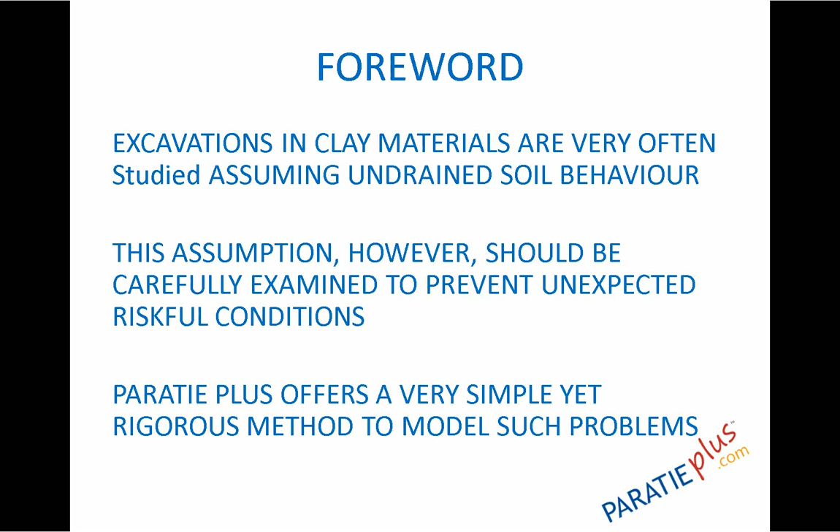With Paratie Plus we can make a quite simple yet effective analysis of such problems very simply. What a designer has to ask himself is to guess whether undrained conditions are appropriate for his soil for that problem, and if the lifetime of the structure or the retaining wall is sufficiently short enough to ensure that such undrained condition holds during all the required period.

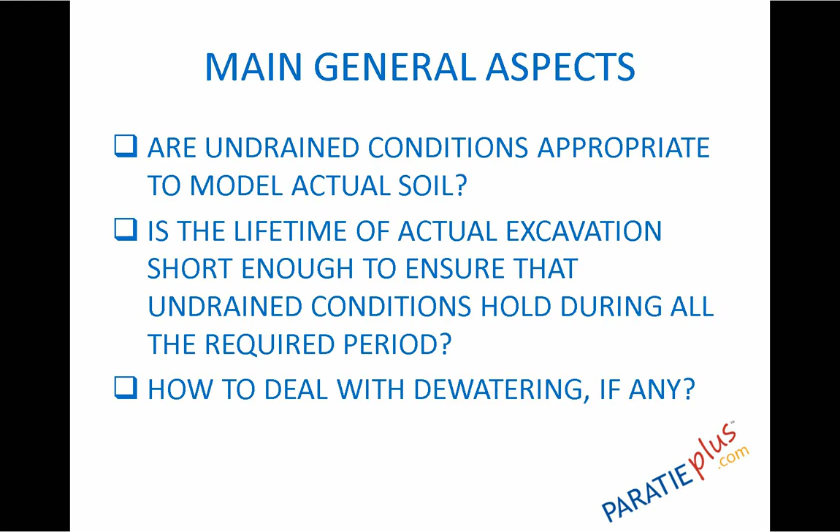Otherwise, more sophisticated, more complex calculations should be done. And also a design question is how to deal with dewatering, so how to remove the water in these conditions. So first of all, let's give some statement, some definition of what we mean as undrained behavior.

Essentially, in soil mechanics, undrained behavior is a behavior of soil in which there is some fluid, normally water, inside the void that cannot seep away when the soil is deformed. And as long as the fluid is almost incompressible, this condition has as a consequence to provide a constraint in how the soil deforms, so preventing a reduction in volume.

So a soil in undrained condition, of course, may deform, but at constant volume. This constraint may have beneficial or also detrimental effects on soil resistance. We will discuss this briefly.

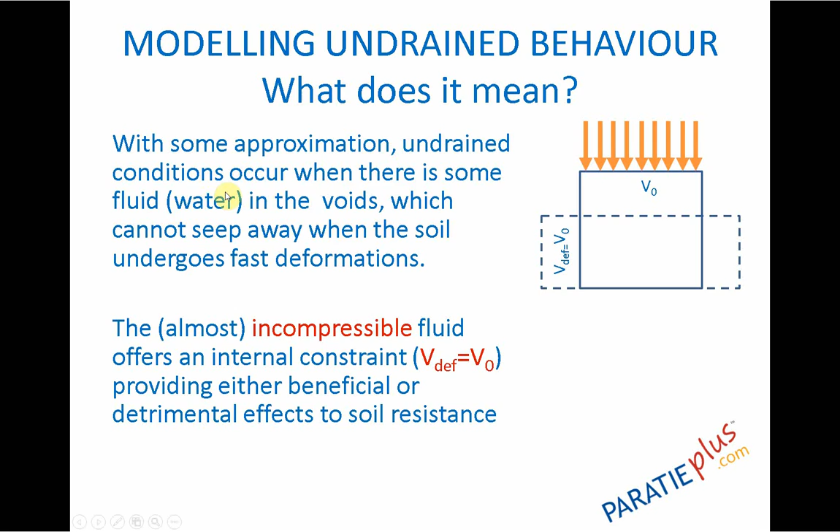Undrained conditions are typical for clay materials and for soils in which there is a relevant part of clays and silts when we consider short-term conditions. In this representation, which is quite effective, we put in one direction the parameter that is relevant in this case, that is the soil permeability, which is very low for clay and for silts and becomes quite high for coarse material.

And on the other axis we put the velocity of loading, or the rate of loading, and we see that for very low application of loading, any soil goes very quickly to drained conditions, so the water can seep away from the volume and hydrostatic conditions are restored.

Whereas as long as the rate of deformation increases, for fine soils we may have normally initially undrained conditions, whereas for sandy soils drained conditions are also applicable to normal construction times. When there is a very fast application of loading, even sands and even gravels may sometimes undergo undrained conditions.

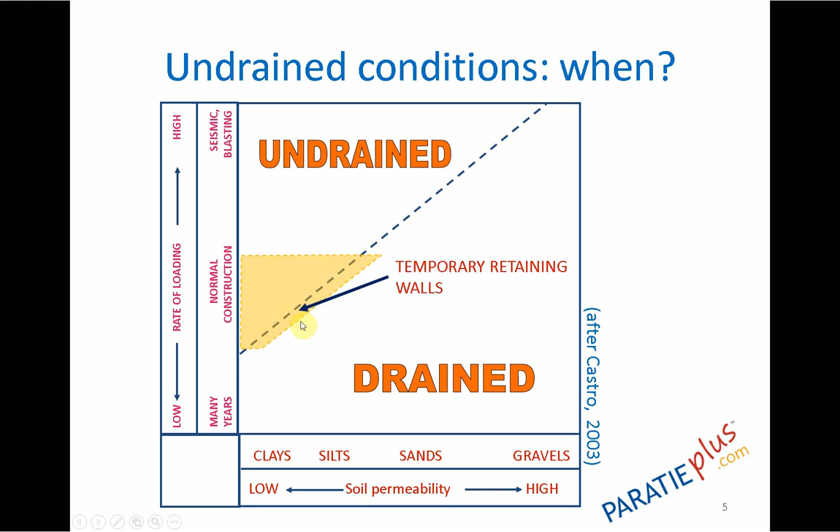But for retaining walls in clay conditions, we are here, or almost here, in this situation, and normally we may consider that undrained condition holds, but we may sometimes exceed the time where the structure may stay in this condition, and so we may go to drained condition.

So as I said, this constraint to soil deformation may provide in some cases some beneficial effect, and in other cases may be detrimental.

Just taking a look at clay, we can say that generally speaking, normally consolidated clay with very small shear strength capacity behaves better under drained conditions. So undrained conditions that occur just after the application of loading may be quite dangerous.

On the contrary, very highly over-consolidated clays that in the past have been severely loaded behave better just after the application of loading. So undrained conditions are beneficial, and in that case, on the contrary, long-term conditions, where this effect vanishes, may be a concern to be carefully considered in design.

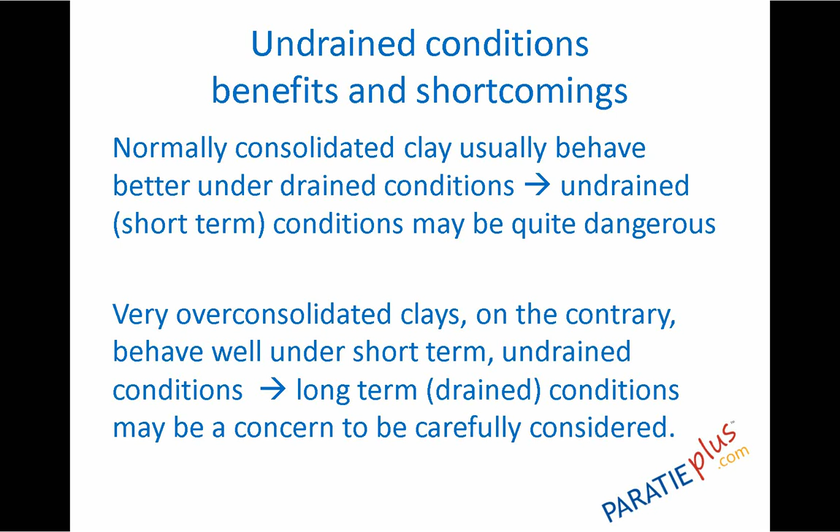How can we describe undrained condition in soil mechanics? There are essentially two practical methods. One method is just to do all the calculation considering total stress. In other words, the stress, the vertical or lateral stress, not subdividing the effective part from the pore pressures.

And in this approach, accordingly, the soil strength is given in terms of undrained shear strength, normally named SU or CU, which gives a yield condition in terms of total stresses. And this is also done for stiffness parameters.

In this traditional framework, pore pressures are not computed because they are automatically incorporated in the calculation of total stress. They may be estimated following some proposal, like using the A and B pore pressure parameters proposed by Dr. Skempton.

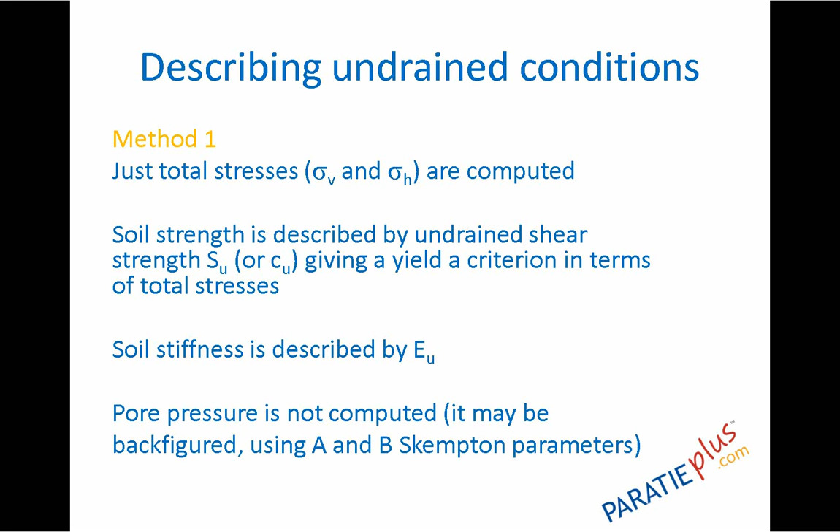There is also a more advanced method, method number 2, in which everything - the resistance of soil - is described in terms of effective stress. The soil strength is related to effective stress parameters like the friction angle or apparent cohesion, if any, that govern the failure condition. Also, the stiffness of the soil is related to drained soil moduli.

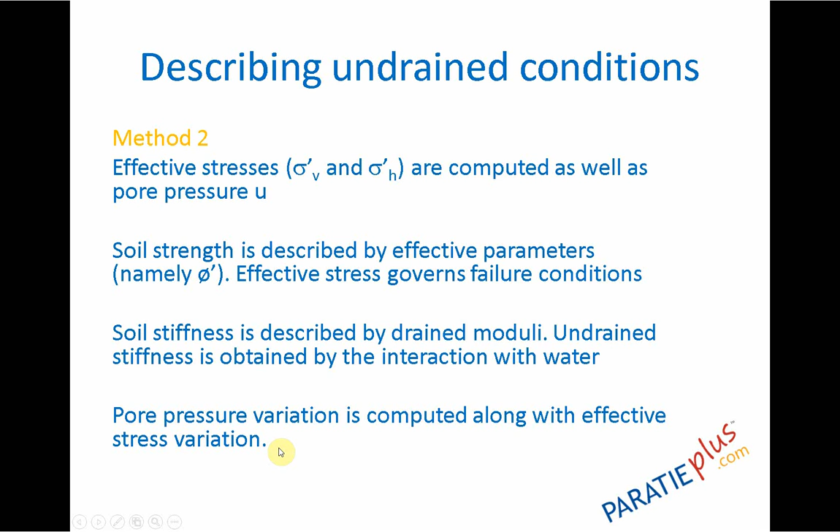Undrained conditions are incorporated by adding an internal constraint, and everything works if the model is appropriately formulated. In this kind of approach, we can keep track of both effective stress and pore pressure variation along any stress paths.

These two methods can be compared. Method 1 is the traditional way of doing things, and is practically the only way we can adopt when we want to do hand calculation.

Another advantage of this method, in my opinion - I don't want to say simple, but quite ordinary - is that it's possible to determine the undrained shear strength capacity by means of in situ testing like CPT testing or SPT testing, along with some very familiar, well established correlations.

Of course, in this method it's very difficult to study long-term conditions, because we cannot know directly how the pore pressure evolved during unloading, during undrained parts. It's also very important to select an appropriate value for undrained shear strength. That is not a material parameter, but something more complex, which we will discuss later.

In method 2, of course, a more complex calculation tool must be available, and normally this can be done only with numerical analysis, like finite element analysis and so on, because you have to do the calculation considering the coupling of the two effects.

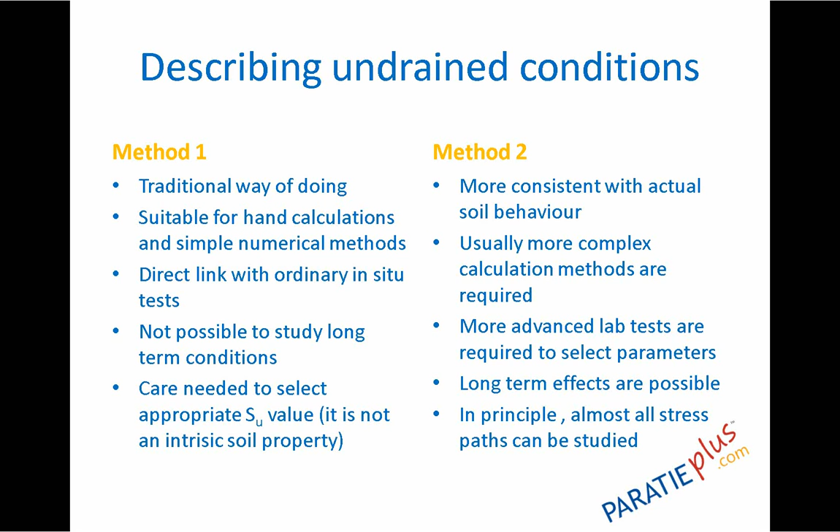Even if we do the calculation with hand schemes and use method 1, it is important to understand that actually the more physical approach is method 2. So it is important to have some knowledge of both methods.

This can provide us some very general statements that may be valuable also when we use method 1. Namely, it's important to remember that the undrained shear strength is not an intrinsic parameter of soil, but depends on the conditions that the soil is in the field, and also on the geological history that the soil experienced in the past. It's important to remember that the higher the past effective load going over the soil, the higher will be the actual undrained shear strength.

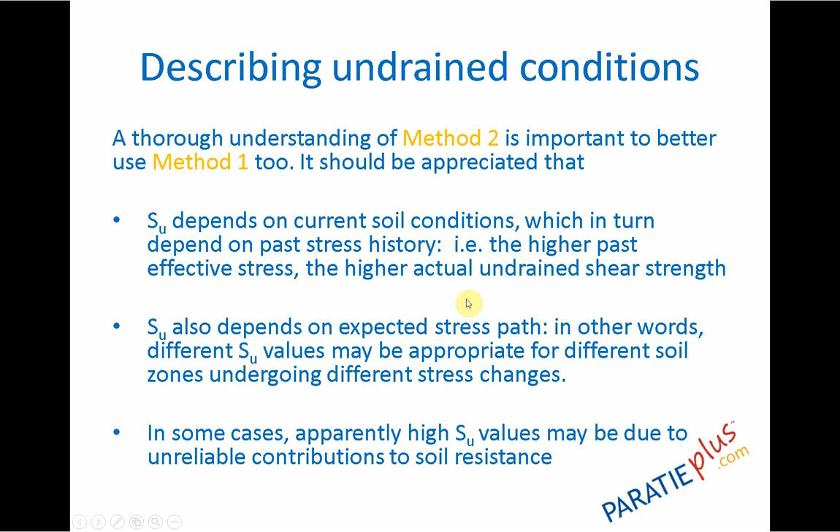This is a special effect that we don't consider in this presentation, and even in Paratie Plus, but it's something that a designer must keep in mind.

When we consider a clay formation, we can quite simply realize whether a soil is normally consolidated or over-consolidated by, for example, using CPT testing.

If the cone penetration tip resistance has a pattern with an almost linear increase along with depth, it means the soil is essentially normally consolidated. Whereas when there is an initial CPT value that may reduce with depth or stay constant, that is typical for an over-consolidated soil.

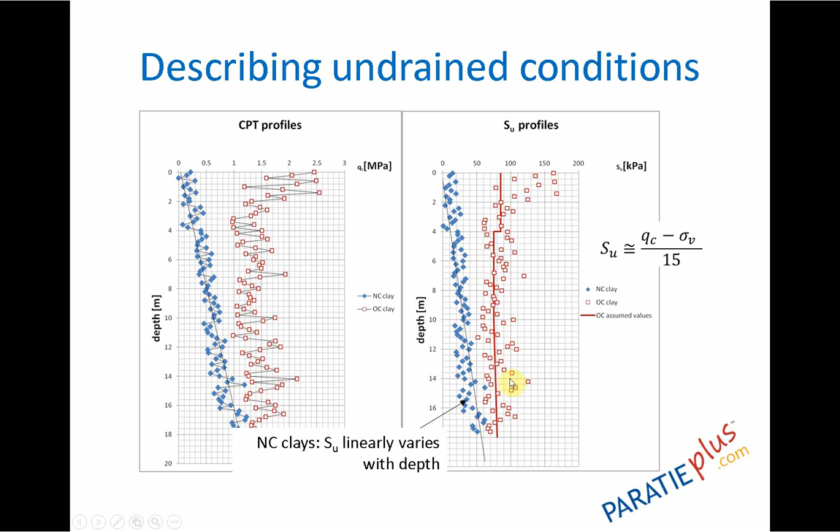These are the undrained shear strength profiles for these two kinds of soils. The undrained shear strength is essentially a linear increase with depth for a normally consolidated soil, whereas it may be constant or have a more complex pattern for over-consolidated soil. The same soil under two different geological histories reveals that the over-consolidated soil has much higher undrained shear strength, especially in the shallow surface zone.

So how can we do the calculation with Paratie Plus? Very briefly, both methods are possible. With method 1, we simply assign the undrained shear strength and some undrained elastic modulus varying with depth for all the clay materials, and we must select an option saying that everything must be done following total stress path only.

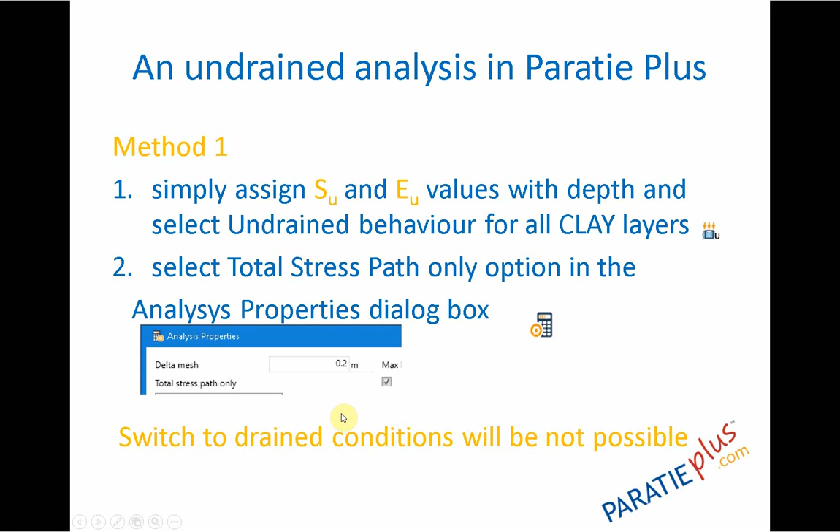This is in the analysis tool, property tool dialog box. We simply have to check this option, and everything will be done considering only undrained parameters. Of course, it will no longer be possible to switch to drained conditions. So Paratie Plus will do all the calculation considering total stress components.

However, at the very beginning of the analysis, the starting point assumes that in the past everything was consolidated. So the initial total stresses are initialized assuming drained conditions and using these correlations.

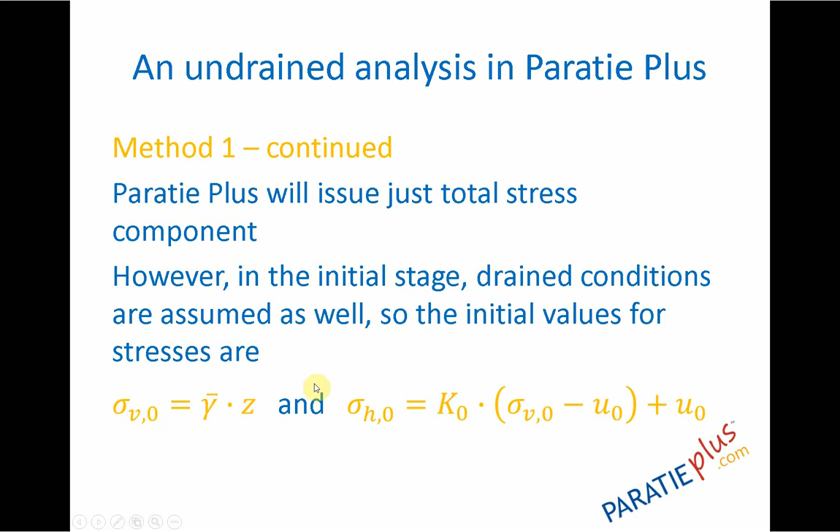Method 2 will be discussed in more detail in a forthcoming video, but it's also possible in Paratie Plus because there is a special constitutive law in which we can give the resistance of clay soils in terms of a constant volume friction angle and a peak friction angle, as well as an apparent limit for undrained shear strength for all the clay. In this case, we must uncheck the total stress path only option.

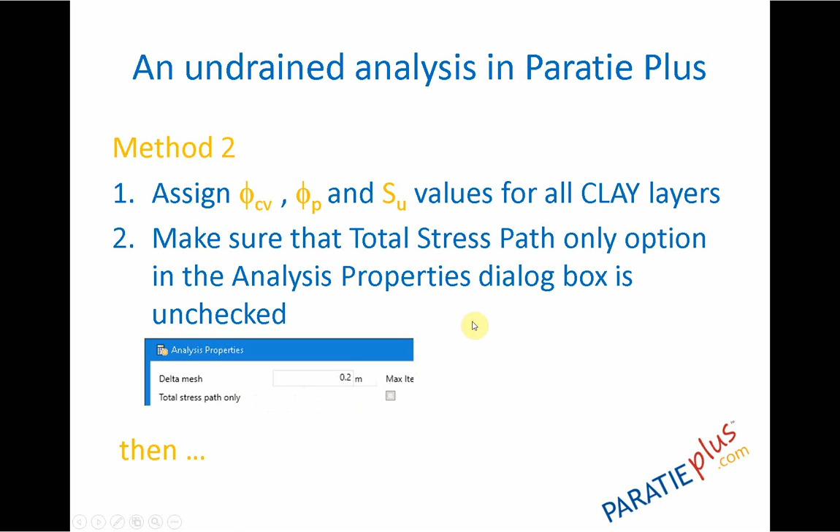What is more important is that we have an additional task compared with method 1: to somehow reproduce the geological history in order to obtain a reasonable reproduction of the actual over-consolidation profile along the soil.

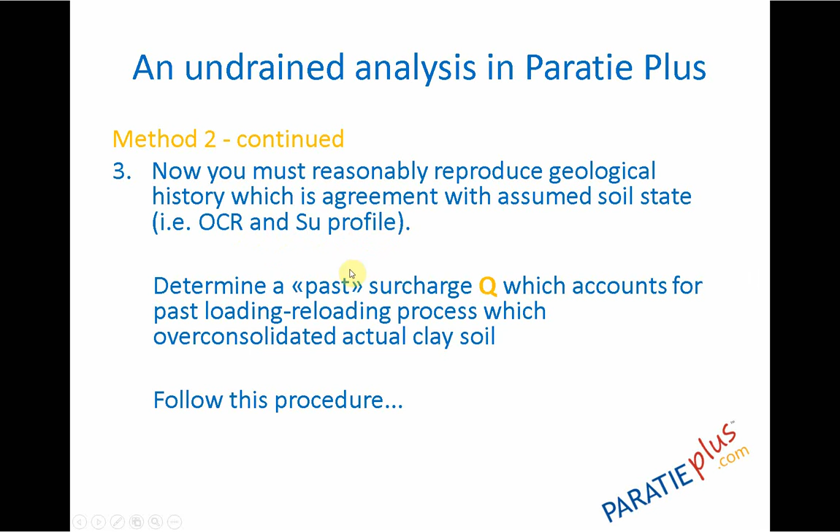Essentially, we propose this procedure. We have to determine, at some points, an undrained shear strength capacity that we want to match with this history. So we can calculate some over-consolidating surcharge that we must add at the very beginning stage of the analysis, taking care that in that condition all the clay soil must have drained conditions.

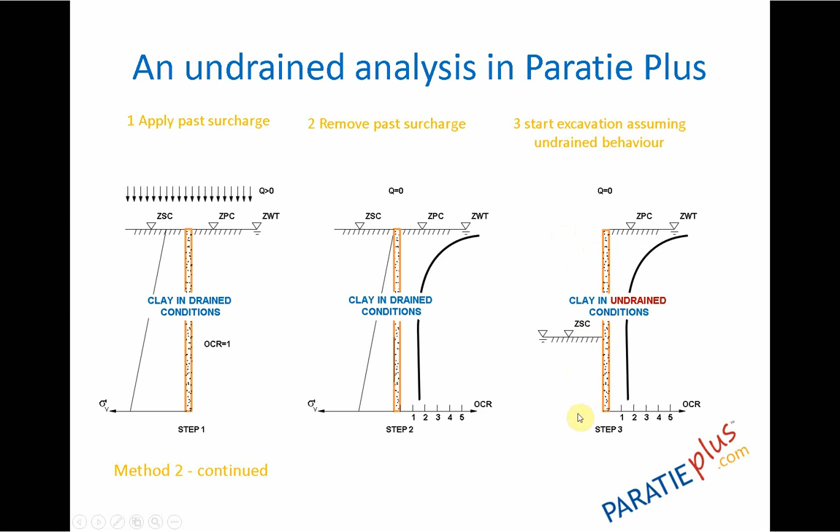So after that, we switch all the clay conditions to undrained condition, and we can start the analysis. Doing so, the model is appropriately initialized, and we have a suitable undrained shear capacity along all the depth along the wall.

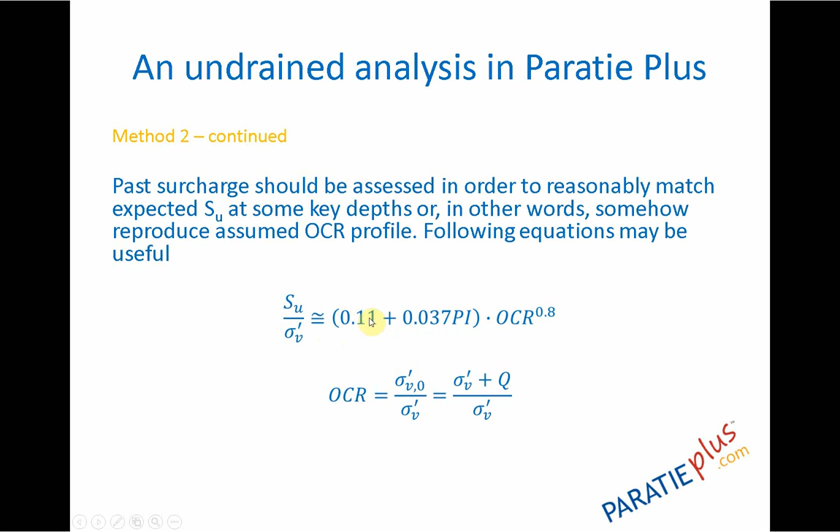It's not simple, frankly, to calculate a good value for the over-consolidated overload, but we may try trial and error, as we will discuss in the following video. Consider that if we know, by sampling, the undrained shear strength at some depth, we can calculate Q in order to match these values, and with some iteration we may reach a reasonable assumption for Q.

As long as this method can distinguish between effective stress and pore pressure, pore pressures are also an additional result of Paratie Plus analysis, like for sands and other coarse material. What is important to see is that pore pressure may appear even above the water table and may become negative, so there may be a suction-like effect, as normally really happens in an over-consolidated clay.

Theoretically, the resistance of the soil is determined based only on the internal friction angle, but the user is allowed to give an additional limit, what we call an undrained limit, and the program limits the shear stress to the lowest between the two limits. Of course, if one doesn't want to consider this additional limit, it is sufficient to set this limit to a very high value.